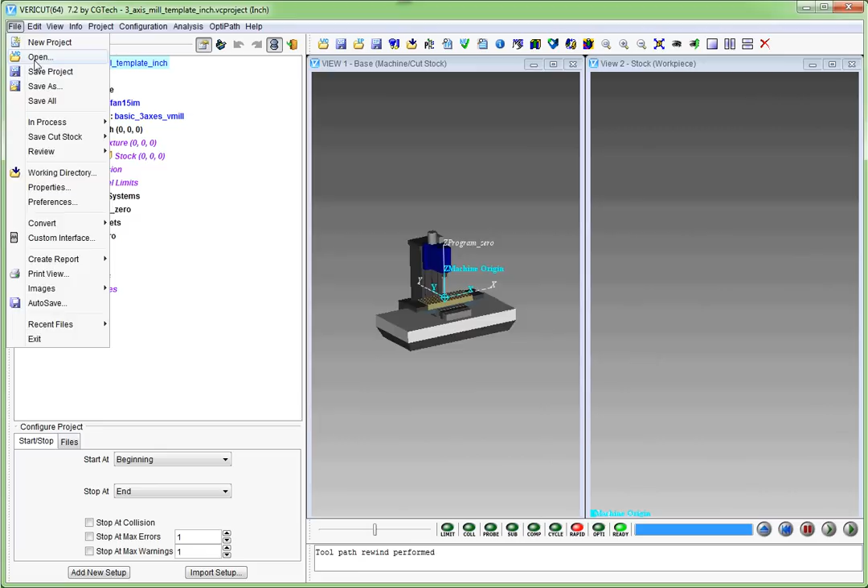So we're going to start out by opening up Vericut just from launching it from your desktop. And we want to open up a template. So I'm going to go with File, Open. Now when this comes up, I'm going to go from Working Directory to Library. And in here I'm looking for a 3-axis mill template for inch. So I click it, hit open, and this comes in like so.

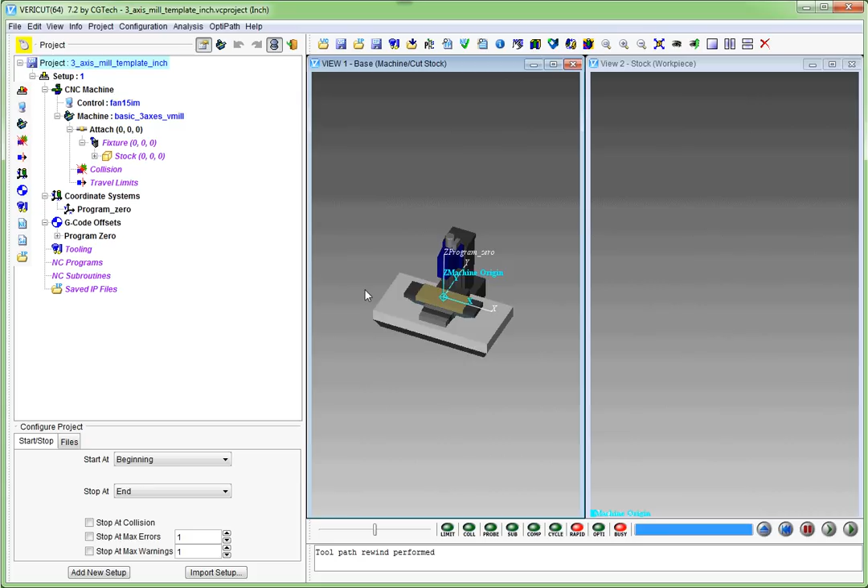Now this is already what I had open, but you'll see I have a machine over on the one side, and I can use my scroll wheel and my mouse to go in or out. I can press down on the scroll wheel and move around, and I can get rotation. And then over on the other side I have a workpiece, which is blank at the moment until I go through and set it up.

So I'm going to go down through this tree. So under Setup, what I'm looking for in here is that under G code, I want to have Scan NC Program Files checked so that it can do canned cycles. If you don't have this checked, you can't do canned cycles. You can do them, but it won't verify correctly.

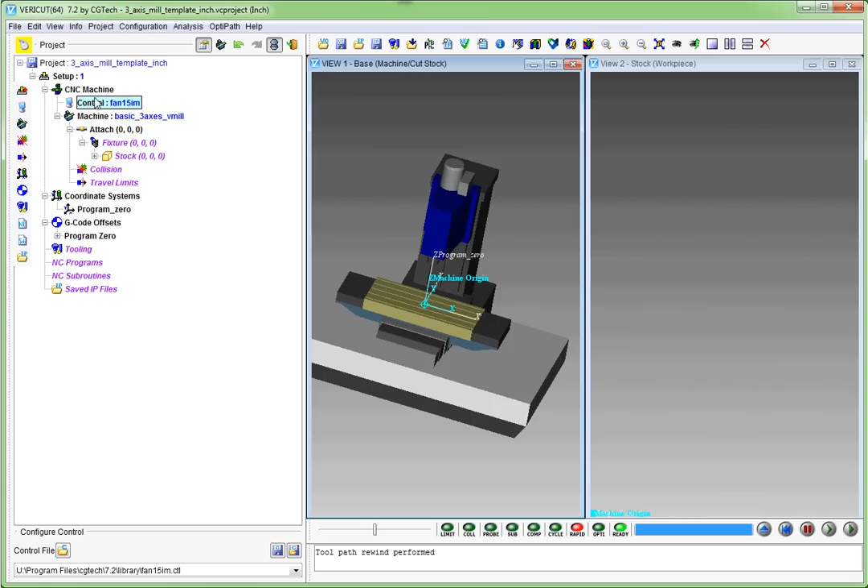For control, I want to double click on the control. And when this opens up, I want to find the control that I'm actually using. So if I look through here, I have all sorts of controls. For instance, in this case, let's go with a Haas Mini Mill control and hit open. Let's say Haas Mini Mill.

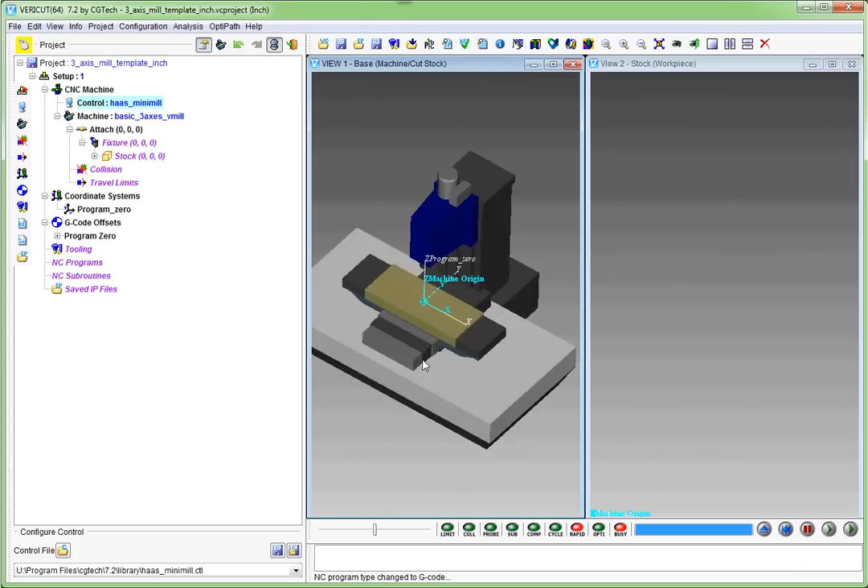Now I'm looking at my machine here, and it's actually a 3-axis mill, which is fine. But if I wanted to, I could change this to a Haas Mini Mill. So I could double click this and look through here, and I can see, okay, I have a Haas VF2 or a Haas Mini Mill. They give you little previews over here. I have a Haas VF1.

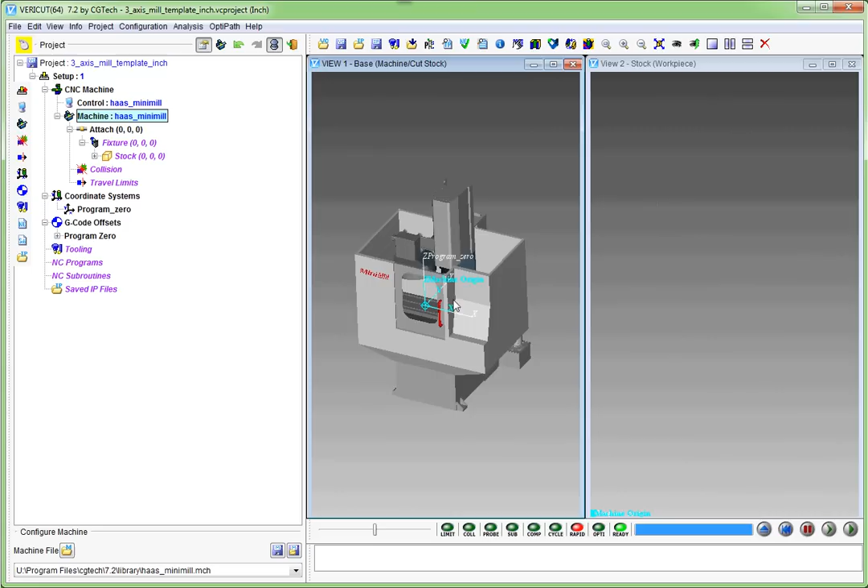My guess is the Haas Mini Mill is probably closest to what we're going to be using. VF2 is not bad either. I'm going to go with the Mini Mill and hit open. And now I have the machine that I'm actually using here showing up on my screen. Alright, so I have my Haas Mini Mill for my machining control.

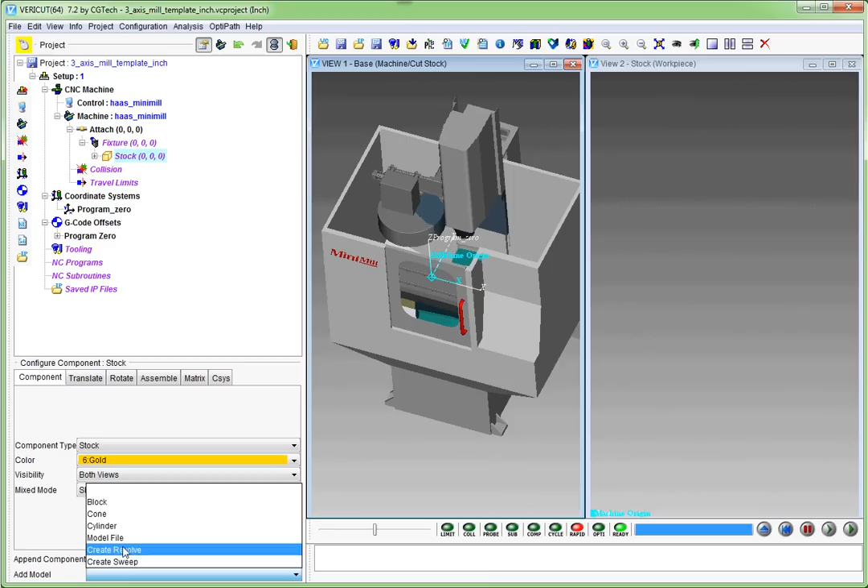And working on down, if I were to try to set up a fixture of some sort, I could use fixture, but I'm just going to go straight to stock. And under stock, I am going to go way to the bottom down here, and I'm going to see a spot that says add model. I'm going to click on this and choose block, because I want to add a block to my part. It comes up and it automatically shows me a 1 by 1 by 1 block. Well, that's not what I want. I want to actually go with a 3 by 2 by 0.250 block.

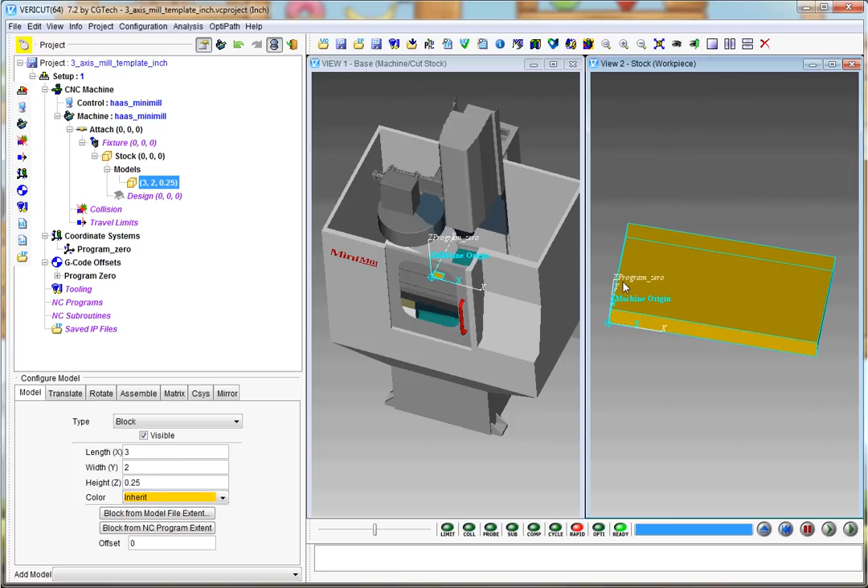If I right click on my screen over on this side, I can fit it to my screen, and I can do the same rotation with my mouse, middle mouse button. And you'll see that my origin's down in the lower left corner at the bottom. So just note that. We will work with it a little later.

I can zoom in on my machine, and I can see it's on my table here. Of course, now with this machine type, it's a little different because I have a door on here, and that gets a little in the way, right? But we'll have to deal with it. I can change my stock to whatever color I want. I'm good with what it is. Alright, so I'm going to keep going down.

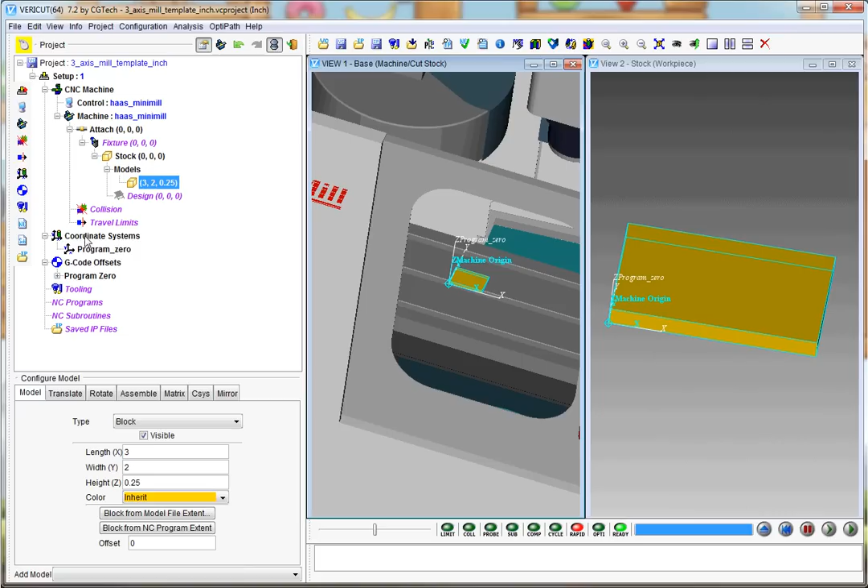I'm not worried about design, collision, travel limits at the time. On my coordinate system, I have a program 0. And that is set up as my stock. It's attached to my stock. And then I have G-code offsets. Now under my G-code offsets, I'm going to double click it so that this opens up where I see subsystem 1, register 1, from tool.

And I'm going to double click on that. Now down here it says configure program 0. Now if I want my program 0 to be in the right spot, I need to make sure that I get it set up. Now my program 0 up here is where my part is theoretically programmed from. So let's go back up to that one.

And in here I'm going to see a spot that says position. Now it's defaulted to the lower left corner at the bottom. If I click in this box, it'll turn yellow, and now I can go in and click wherever I want. So say it was the center of my part, I could click here. That's my new program 0. That's not where I wanted it.

For my part, I want it in this lower left-hand corner at the top. So if I ever need to make changes, I just click it again until this turns yellow, and I go in and pick where I want. So I want right here.

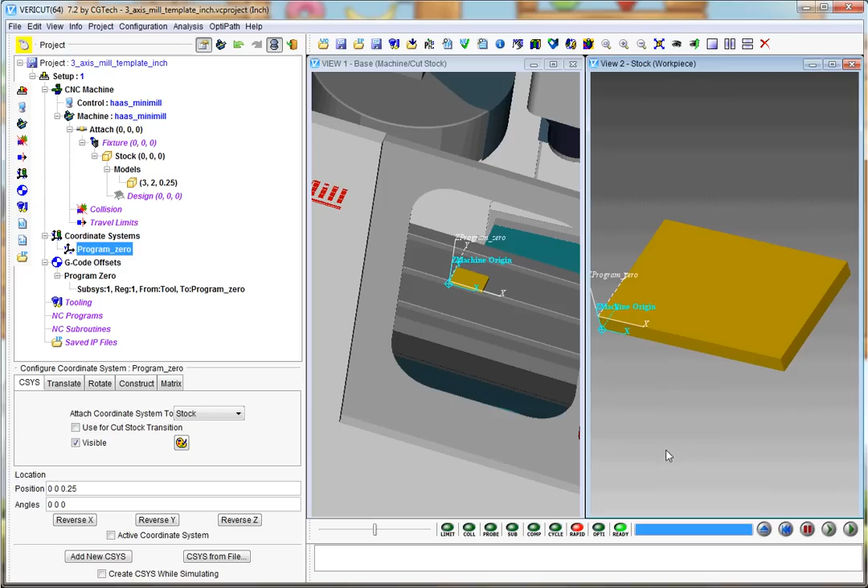I'm going to fit it back to my screen. Zoom out a little bit, zoom in. And I'll see that this is up at the top in the lower left-hand corner. So that's my part 0. I could rename that if I wanted to be G54. So instead of part 0, I could say G54. That way I could tell, okay, that's my G54 right where I was programming from.

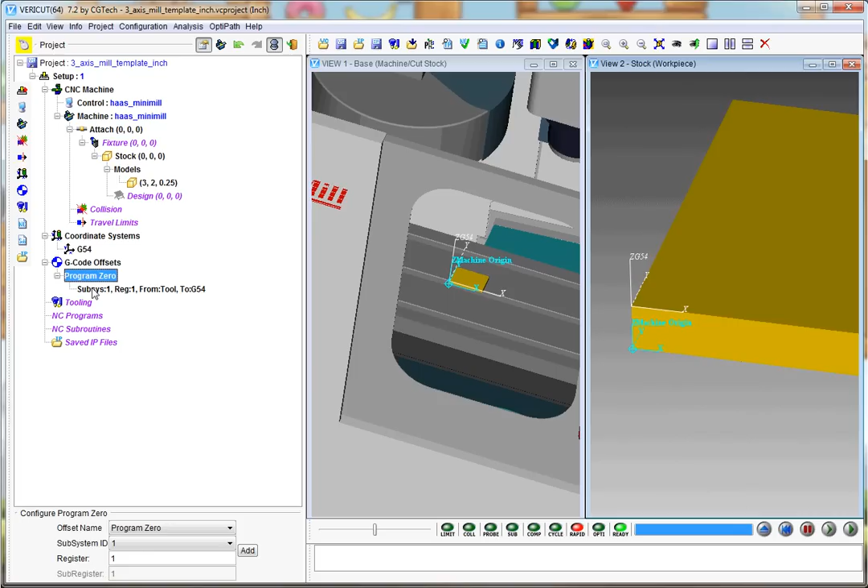So down into here I have my program 0, my subsystem. Now for my subsystem, I want to change this so that it's my work offset. So I'm going to say, okay, work offsets. In here, I want to use register 54.

And then I want to keep going down, and I want to say that to go from spindle, I want to change that to tool. So I'm going to find here I have tool. So it's going to go from the tip of my tool down to, instead of being a component origin, I want to change this to a coordinate system origin. And it's my G54. Now if I hadn't renamed that to G54, this would say program 0. So I have that set up.

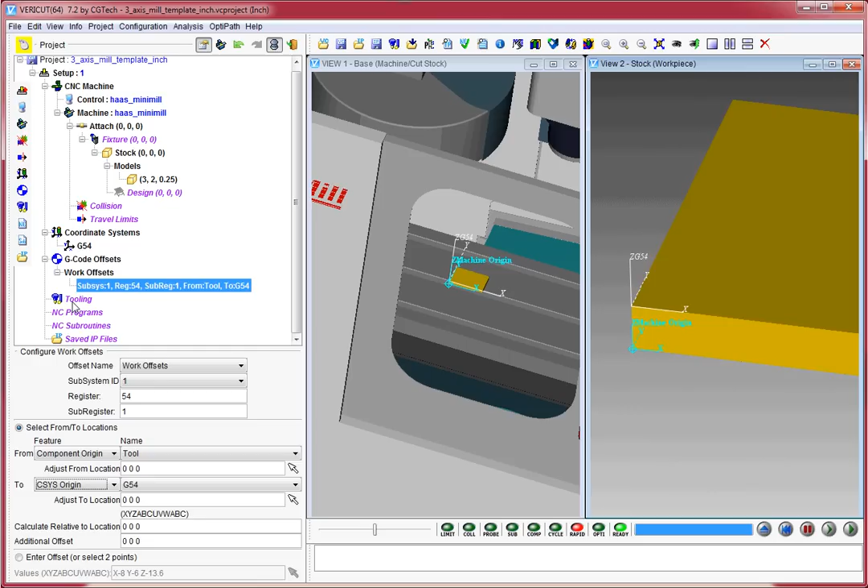Now I would want to set up all my tools. Now I'm going to have 4 tools in this case. I'm going to show you how to do those. So I would go to tooling, and I would double click on it to get this page open here. And I want to add 4 tools to my part, but it doesn't matter how many tools you have, it's going to all work out the same. So I'm going to say add tool, new mill.

Now in here I'm going to choose what type of tool I want. I can have end mill, ball end mill, bull nose, and so on. I want to go with an end mill, and I want to have a diameter of 0.250. So 0.250. A height offset is the length of my tool. So I want to say, okay, in this case maybe 2.0. Flute length 1.0. Shank diameter 0.250.

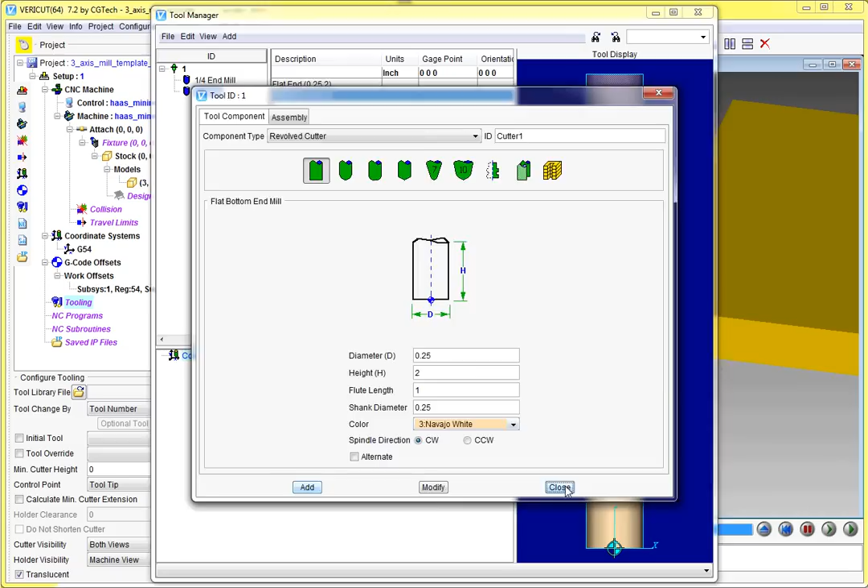You could change the color of it. I'm going to make it a different color here. And then up on top here I name it. So in this case I want to have a 1/4 inch end mill. And I hit add. Now I accidentally added a second one here, so I'm just going to delete that.

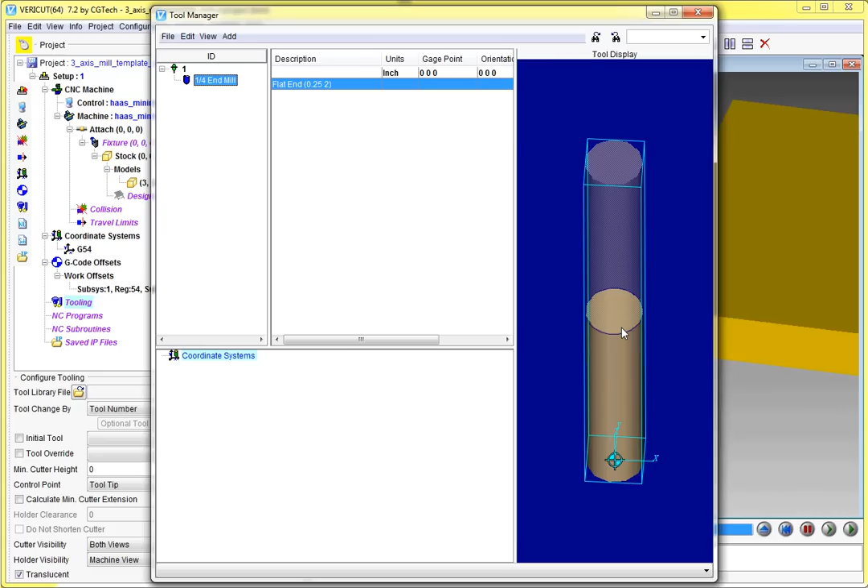So I have my 1/4 inch end mill, and you'll see down here I have a driven point, and this is where it drives the tool from. But if I rotate this down, I can add what's called a gauge point. And the gauge point for the most part is just how far you want this to stick out of your turret or the holder. So in here I would click in the gauge point box, and then if I move over to my part I could add a gauge point. So I want it to be the center of my tool up on top. I click, and I have my gauge point.

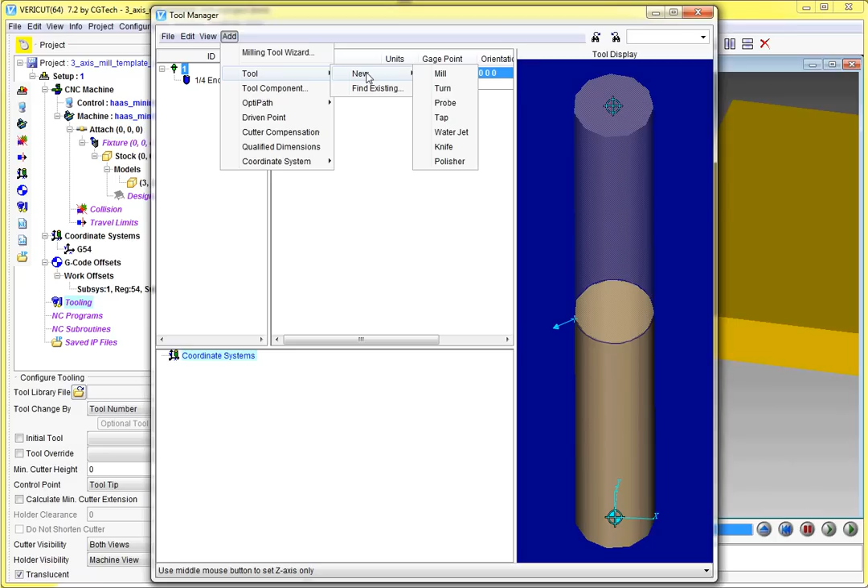Now I'd go through and do this for the rest of my tools. So I'm going to add tool, new mill. My second tool is a drill with diameter 0.375, 90 degree for an angle because I'm using a spot drill. Length of the tool, we'll say 2, flute length 0.250, and shank diameter 0.375. I'm going to change this to a different color and hit add.

Close. Now you'll see in this case I didn't name the tool right away. But if I right click on this tool I can say rename, and I can call this a 90 degree spot drill.

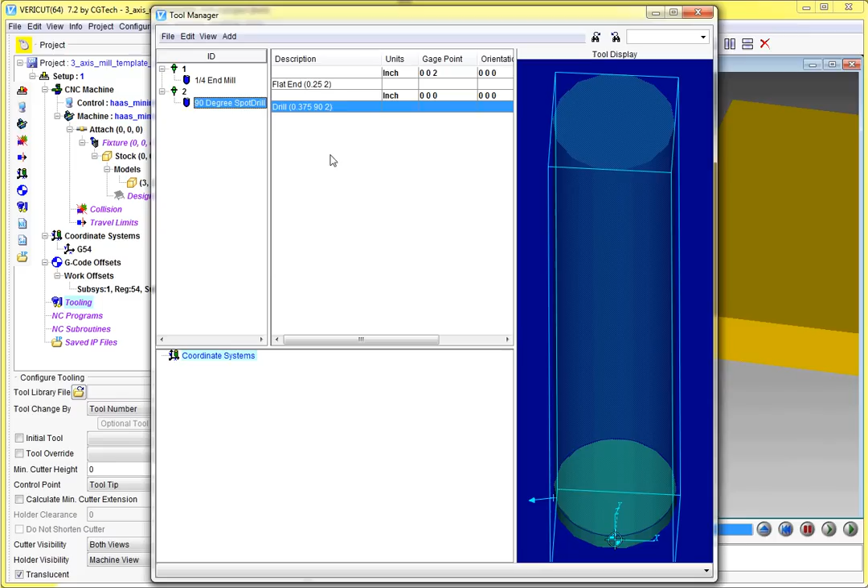Now that tool's named, and if I click on these you'll see how it switches between my tools. Now for my 90 degree spot drill I want to click on the gauge point and choose this top center. Now I have a gauge point for both.

So I'm going to add tool, new mill again, and this time I'm doing a drill, 0.1875 with a 118 angle. Maybe I'll make it 3 inches out and a flute length of 0.5. Shank diameter will match the drill. And I'll make this one a different color.

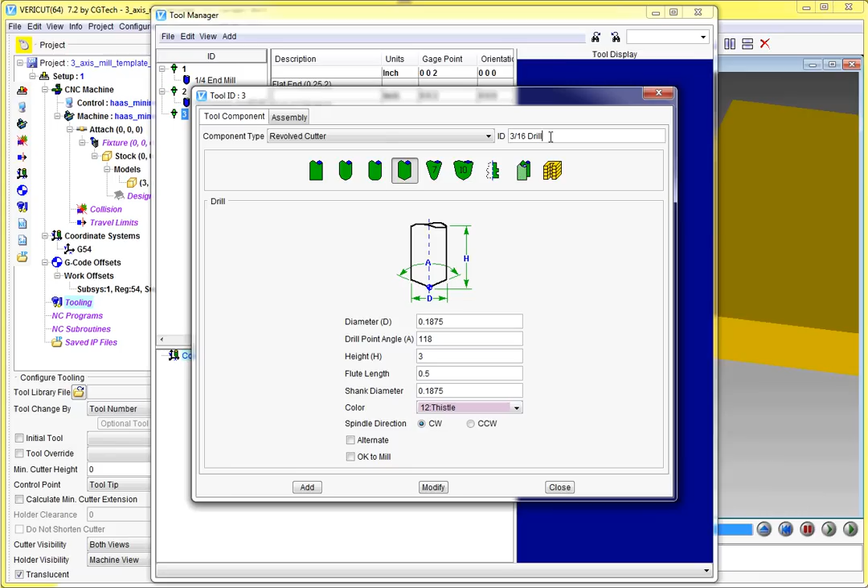Naming this one a 3/16 drill. So add that. And I close this. So I got my 3/16 drill. Click the gauge point, choose the top center.

And my last tool is Add Tool, New Mill. And I want this one to be a ball end mill with a diameter 0.125, a height of 3, flute length of 1. I'm just kind of making this stuff up as I go. Shank diameter 0.125, and let's make the color of this one blue.

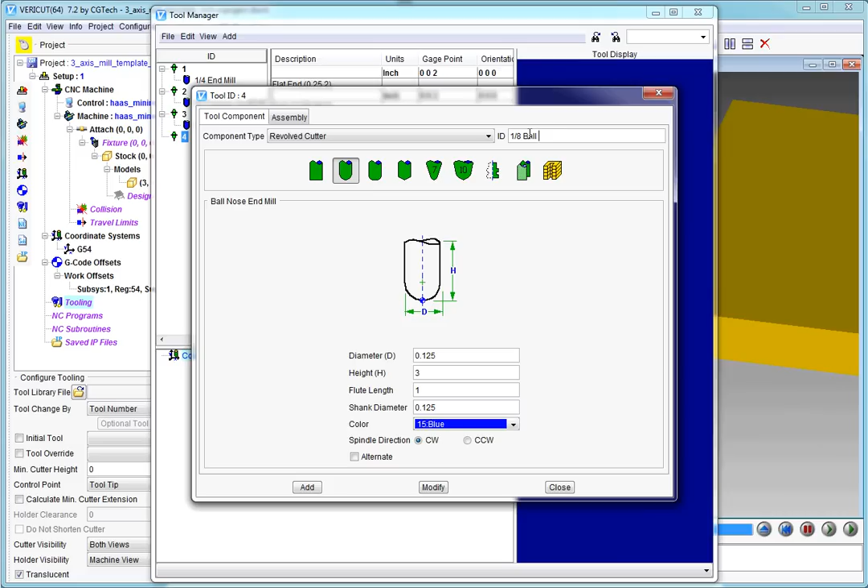ID, which is your name, is a 1/8 ball end mill. Alright, and I hit add and close. So I got it. I am missing my gauge point, so I'm going to choose my gauge point up here. And I have it all ready to go.

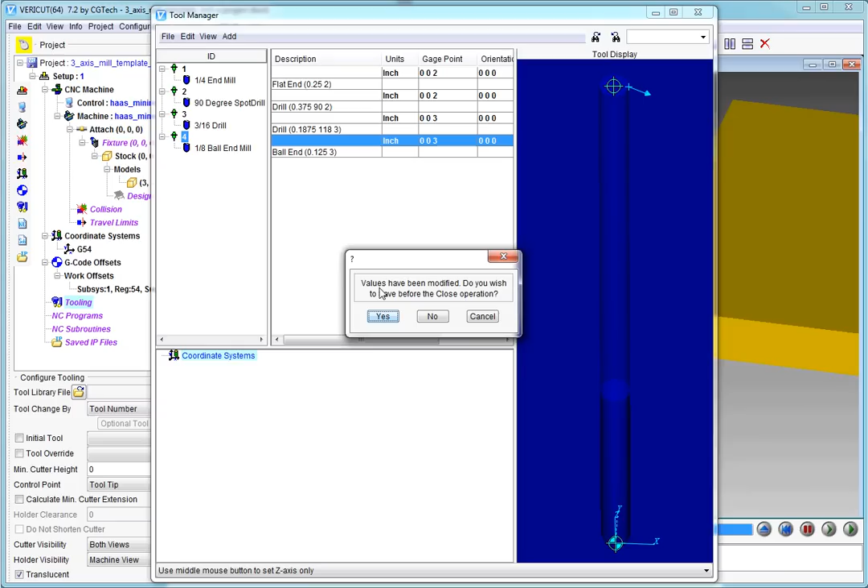Now this is a separate file than your Vericut file. It's embedded in the Vericut file, but you need to save this as well. So I'm going to hit the red X up here, and don't worry, it'll ask me to save. So I hit that and it says, okay, values are modified. Do you wish to save before closing? Yes, or we lose everything. So I say yes, and I'm now going to save this to a location.

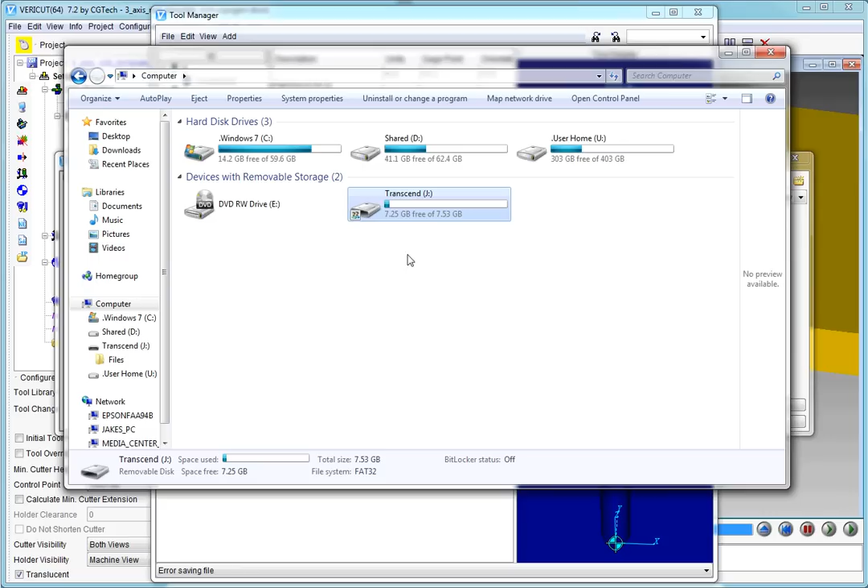Now I've yet to make a location to save any of this stuff. So what I need to do is open up Windows Explorer. So I'm going to minimize this here. And this would have opened up for me, and I want to then find my location I want to save it. In my case, I want to save to my removable disk or my flash drive. So I double click that, and I'm going to make a new folder for this project. I'm going to call this Project 1.

So I made a folder, and now I'm going to double click on this folder, and you'll see it's empty because I just made it. But that's where I'm going to want to store everything. So I'm going to close this, and in here then I'm going to search, and I should then find this in my list somewhere. So I'm going to have my Transcend, which is my removable, at Project 1.

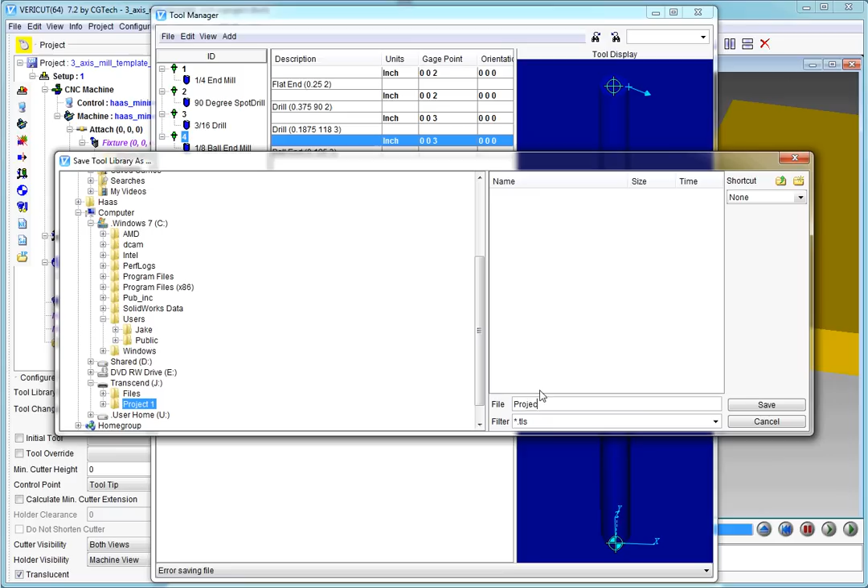So that's the file I want to save in, and I want to name this Project 1 Tools, just so I can kind of keep it in order. And I hit save. So now that has saved this file for my tools. Now while I'm at it, I might as well save this whole project as well.

So I'm going to go File, Save As. Make sure you do Save As, or you might have the chance of overwriting the template, which would be bad. So I'm going to go Save As. I'm going to search for my flash drive. So I have my Transcend drive, in my case Project 1, and I'm going to then name this Project 1,

and I hit save. So now I've saved two files, Project 1 project, which is project1.vcproject, and a tool list. So if I were to go back into Windows Explorer and look under my projects, I would see I have two files here, Project 1 Tools and Project 1 VC Project. So I can close that.

Alright, so I'm pretty close to being able to verify this. I've yet to have a G-code, so that's going to cause me a little issue. But I've written one already. So if I look here, you'll see that I already have one written. I'm not going to show you how to write this because that's the point of the G-code class, right? You got to learn how to do it on your own.

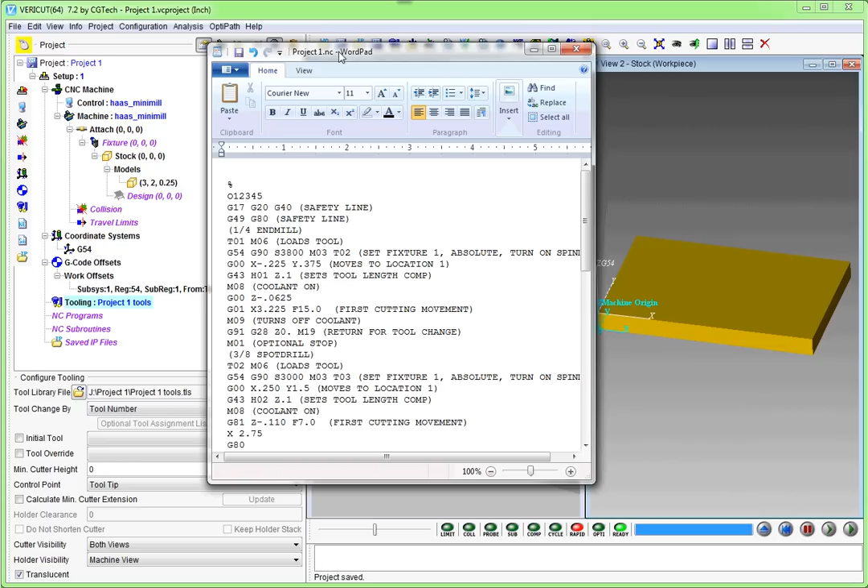So here's the project that you're going to be given. Looks like so. There's your code. And I save this as project1.nc. Now this is just saved to a random spot. So right now I'm going to save this as, and I'm going to save this to that same drive. So I'm going to go to my flash drive, project 1, and call it project1.nc.

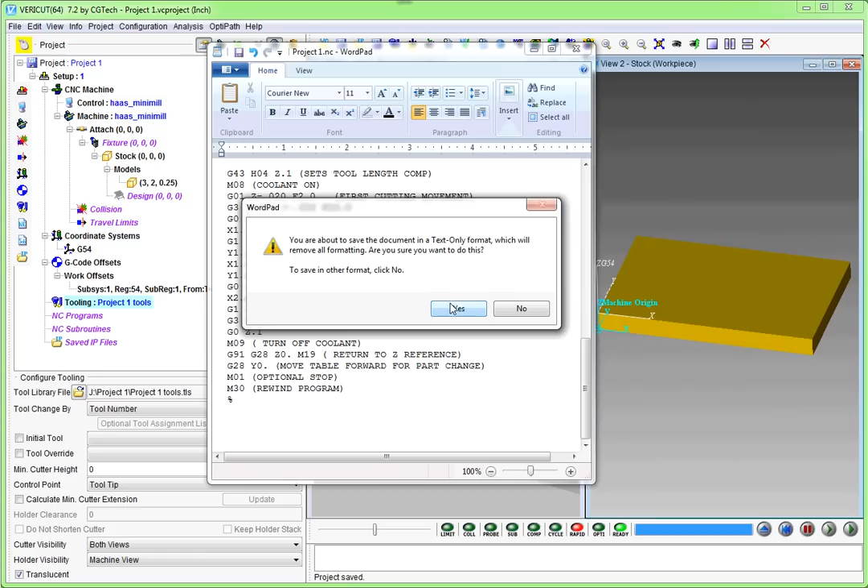Hit save. And it's going to tell me that you're about to save a document in text-only format, which is good because that's what we want for NC code. Alright, so I can close that file. If I look in my Windows Explorer again, you'll see that I have 3 files now. One's project1.nc, that's my actual code. If I were to double click this, you'd see it open up. That's the code that I had written.

Alright, now I need to put that code into this file. Right now it's not linked to it. So if I look right here, I have NC programs. I double click this, and I'm now going to search for that file I just saved. So I'm going to find transcend project 1. Now when I do that, it finds only the projects that will work, the ones that are compatible.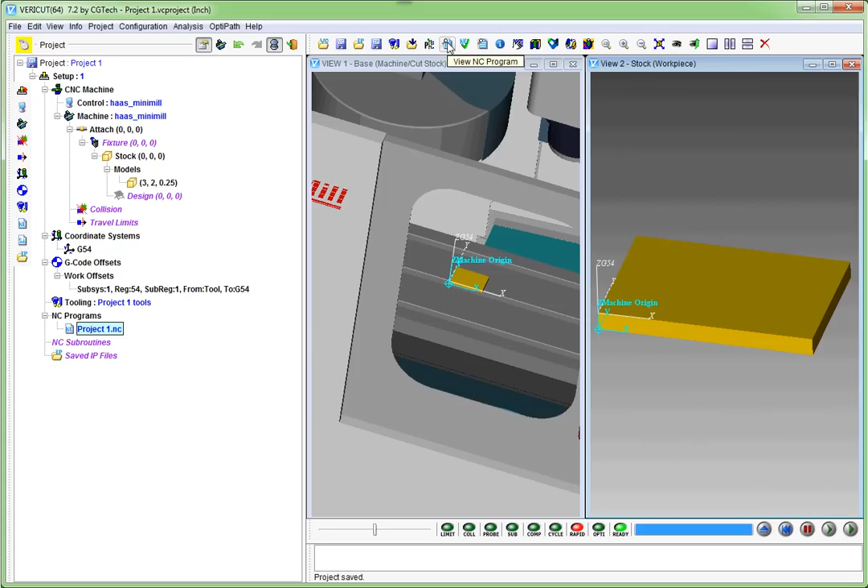So up on top you have a bunch of icons. I don't use too many of them. The one that I do use a lot of is View NC Program. And I want to reset this. So if it comes in with a bunch of gibberish, which it does sometimes in the new file, you have to hit the reset button down here, and that'll reset the code.

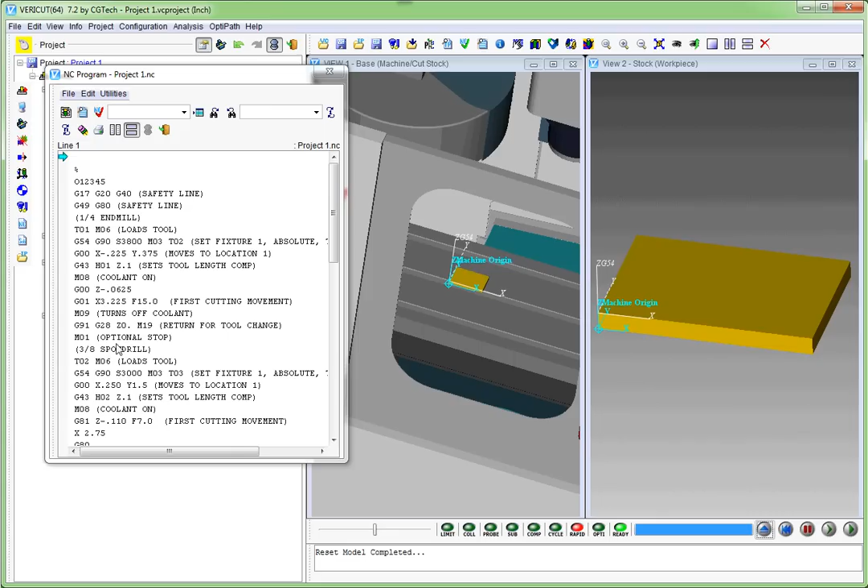So now I can see this is the actual code, and I have a little blue arrow next to it that will step down as I step through this. So right here, I can hit this button to step through, this button to run it. So I want to hit step, step, step, and as you can see, it is adding this blue line next to each line of code as I go. So I'm just going to step it through, and at some point you'll see my machine change.

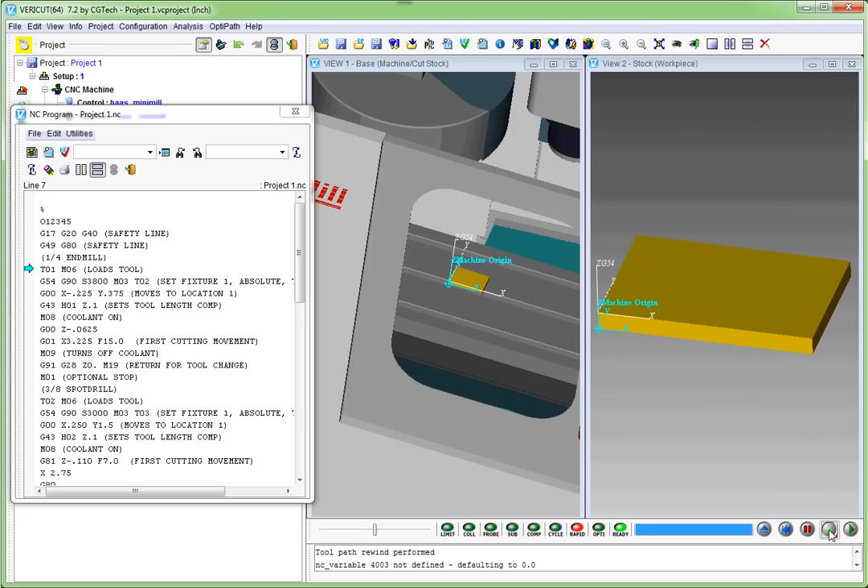Now you may not have noticed here, but it did a tool change. So I'm going to reset this again so you can watch it. Step it through, and when it gets to the T1M6 line, okay, right here when I click, you're going to see a tool change. So you may have just saw that jump over, but it was doing a tool change. And now you see my tool is in here.

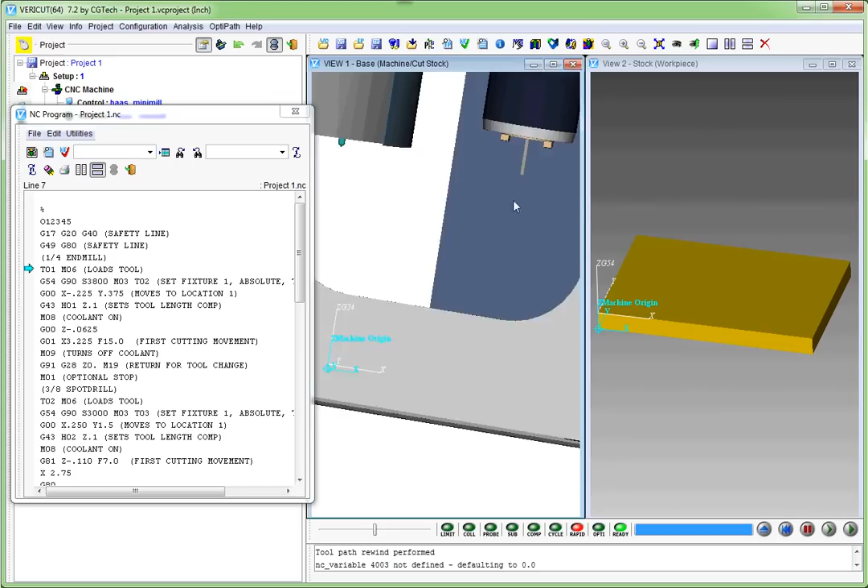Now, what's kind of funny is it doesn't show a holder because I'm not getting into the whole how to draw holders and everything. I just want to see a tool. Maybe in some more advanced ones I'll show you how to make holders and stuff. So there's my tool, my part. So I'm going to keep stepping through. It's going to go to a G54.

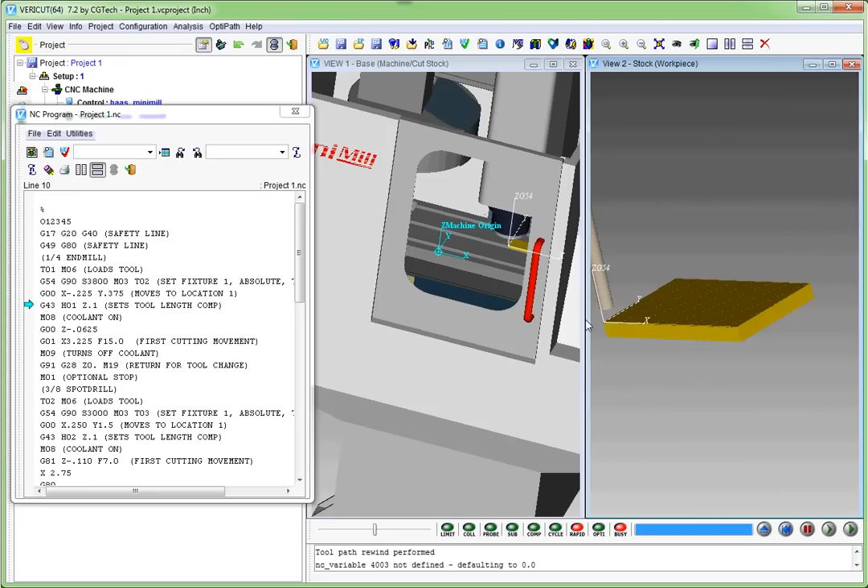It's going to come down. Now you see it came down here. And I have my part here. Step it again, it's going to plunge down. Cuts across my part. And it will just start doing some more of the code. It's going to get the spot drill, so it does a tool change. Moves over. It's going to spot my holes.

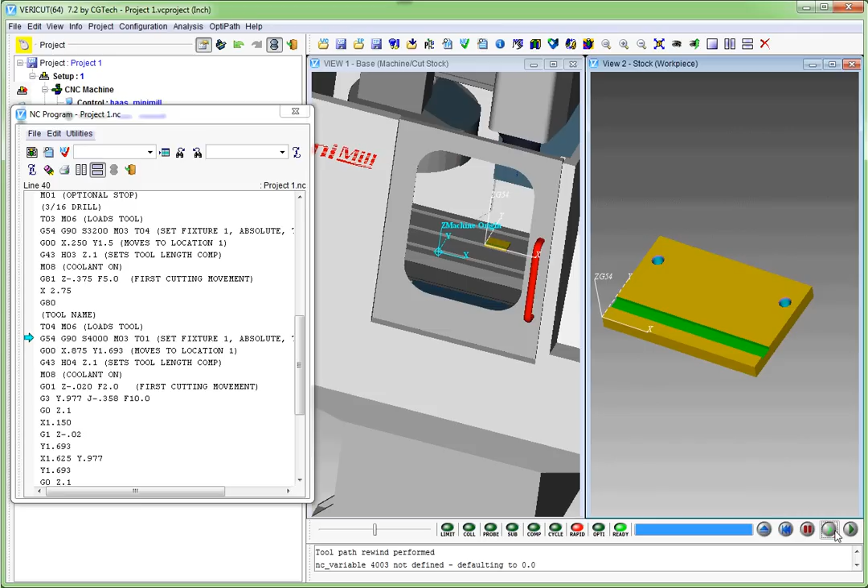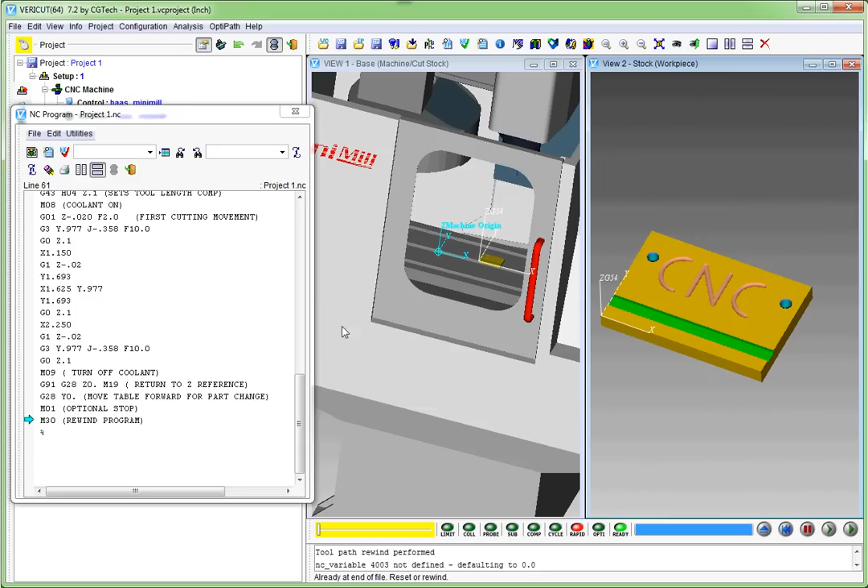So it has run my code, and everything looks pretty good. So there is a quick walkthrough. But we're going to look at this and say, well, what if there was a mistake? What if something wasn't quite right in here? Maybe I wanted to change the depth of a countersink call. Well, if I reset my program, I can close my NC program here, and then I can do some editing.

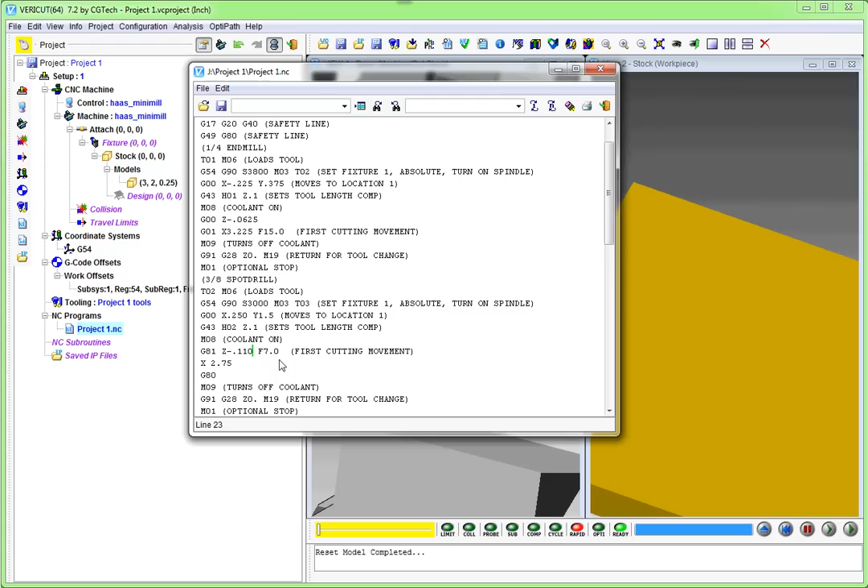So if I went up to Edit, NC Program, clicked on this, this brings up an editor that I can use now. So I no longer have to edit in my Word file. So I can come down here and I can search through here, and I can look for T2. I want it to spot drill maybe 130 deep. Now you'll see when I make changes, anything that I delete, it turns into red with a line through it. Anything I add new makes it blue with it underlined.

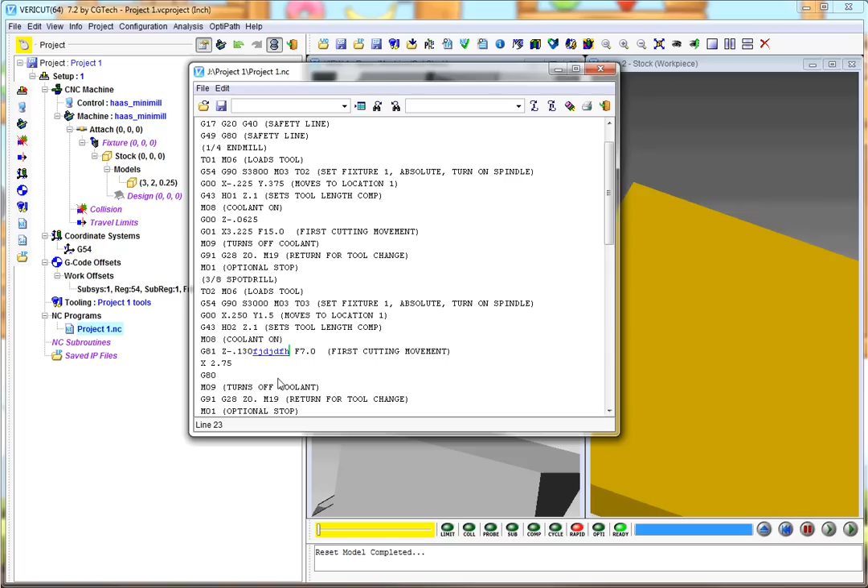So I'm going to save this, and you'll see when I do the save, it overwrote that. So if you've yet to save it, it'll look wrong. So if I do some gibberish here, until I save it, that will not be there. So I just delete this. Close out my edited file. And then I'm going to reopen my NC program over here for simulation.

Now if I were to go through this and play it, you'll see that it spotted my hole a little bit deeper. So that's the basic walkthrough on Vericut and how to get it to work for you.